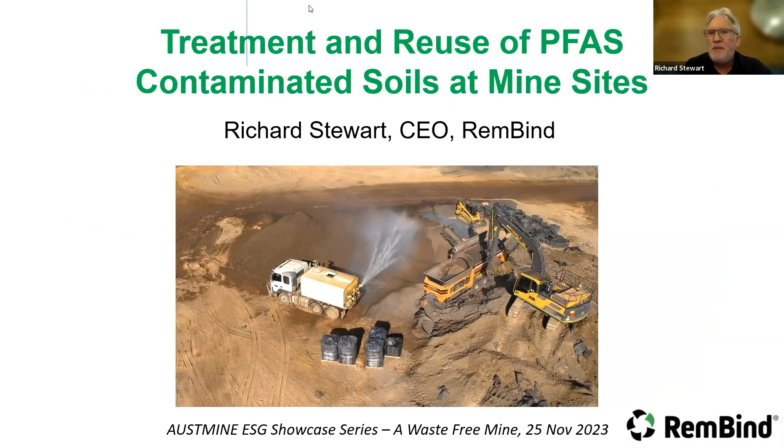I'm going to talk today about the treatment and reuse of PFAS contaminated soil at mine sites and how that aligns with the concept of a waste-free mine. So firstly, what is PFAS? It's a group of man-made chemicals that have toxicity characteristics. They're found in a range of products, including certain firefighting foams, non-stick cookware, and even, I found out recently, in makeup and lipstick, which is a bit of a worry. Due to their highly stable chemistry, they're very persistent in the environment and they accumulate. They've been found in soil and water at an increasing number of sites worldwide, including commercial airports, defence airports, and also at mine sites now.

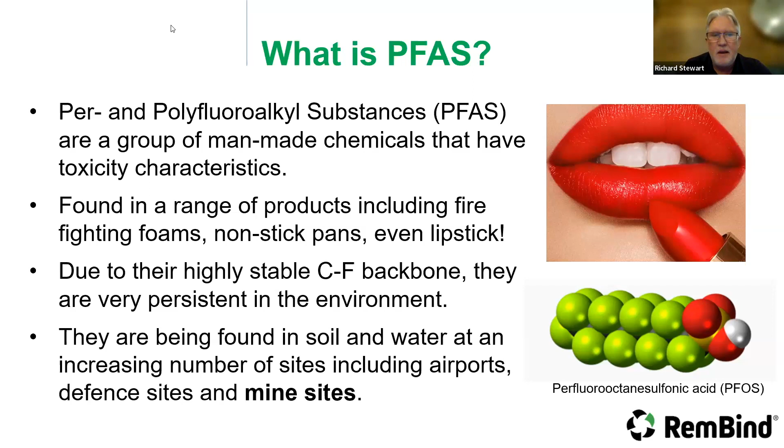So at a typical mine site, there are a number of sources of PFAS. The main source is from the historical use of certain firefighting foams for training, but also in the automated fire suppression systems throughout the mine. Once PFAS makes its way into the soil, it can then make its way to other parts of the mine. So, for example, if surface water runoff takes PFAS from a fire training area into a dam, and then water trucks load up from that dam and use that water for dust suppression on roadways, then you get a wider spread of that PFAS issue across the mine site, albeit at a more diffuse level. And so PFAS in the soil is considered a waste, and then you have to look at how you're going to manage that.

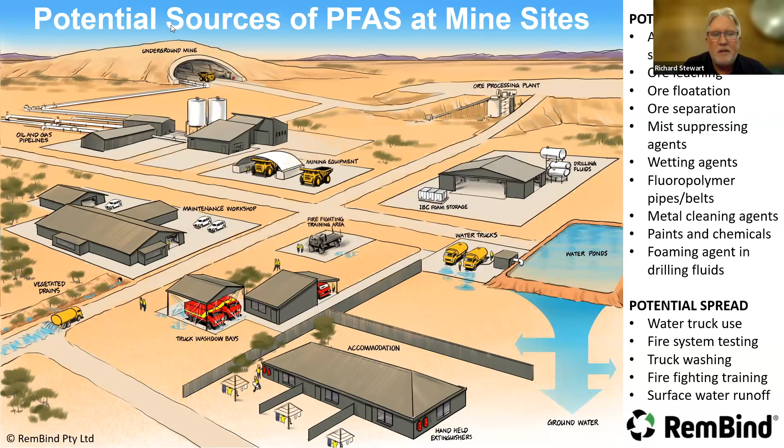The treatment alternatives for PFAS in soil are shown here. The first one's landfill. Most of these mine sites that we're talking about are hundreds or thousands of kilometres from the local engineered landfill. So that's a cost prohibitive pathway, but also it's unsustainable to put large volumes of relatively low PFAS soil into landfill. The other options shown here are thermal treatment, which there's not really portable equipment available for yet for on-site treatment, and also it's energy intensive, so expensive. Soil washing, where you wash the PFAS out of the soil, is a viable technology. There's some portable equipment available, but then you're left with a PFAS liquid concentrate, which you have to deal with, which is costly and also logistically difficult.

And the third option here is stabilization, which I'm going to talk about today. This is where you add a powder to the soil. It binds up the PFAS. It doesn't remove it, but it stops it leaching into groundwater, where it can cause issues with human health and the environment. And so the study that I've referenced here shows that stabilization is the most mature and viable of those treatment technologies for soil. And it's also the most cost effective.

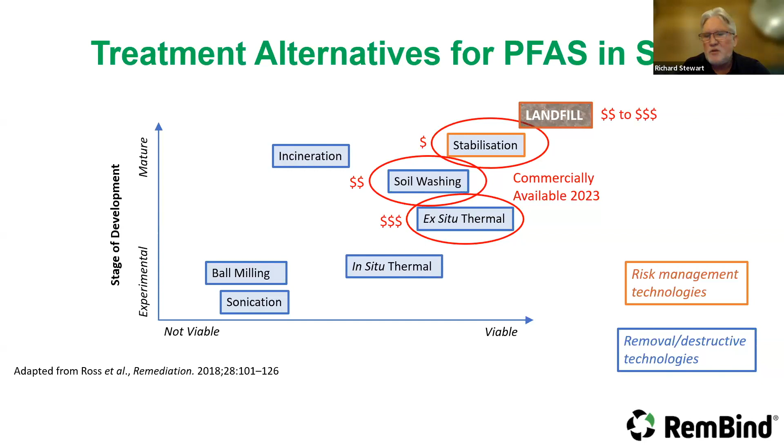Another benefit of stabilization is its greenhouse gas emissions footprint. So this data, which is out of a US market report which will be published soon, shows that stabilization has a 43% lower footprint than dig and dump or landfill, and 90% lower than offsite incineration. And there's also a much lower risk of injury and fatality because you're not having to transport that soil offsite outside the mine.

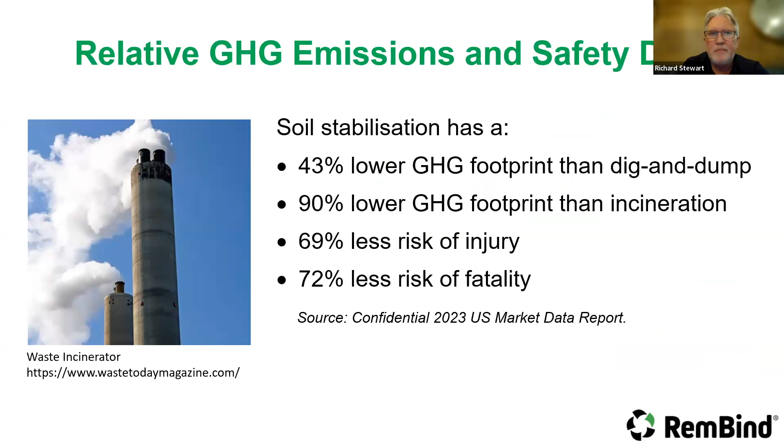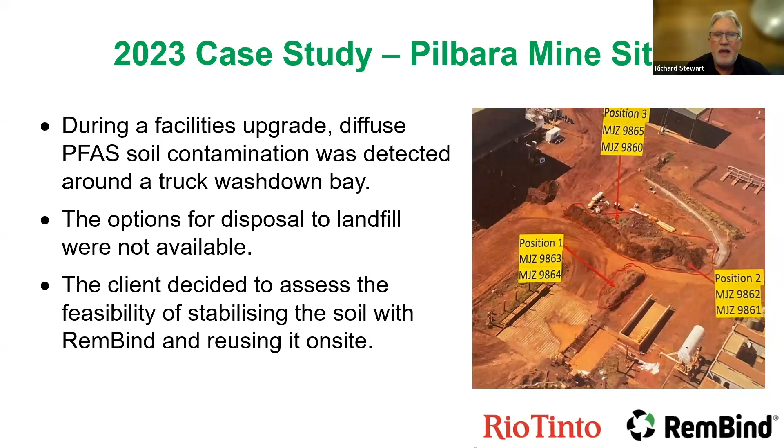So I'm going to now run quickly through a case study that we did earlier this year with Rio Tinto. During a facilities upgrade at one of their Pilbara mine sites, they found some diffuse PFAS contamination around a truck washdown bay. The options for disposal to landfill weren't available. It's a very remote mine site, and the client decided to assess the feasibility of stabilising that soil with our RemBind stabilisation products and reusing it on site.

The rationale for using our products at the time was that they'd been applied at full scale in a number of large-scale projects worldwide, so they're fully proven. There was also demonstrated long-term stability data, which had been independently validated by other parties to show that once you bind this PFAS up, even though it's still there, it won't leach in the longer term. It's also manufactured in WA in commercial quantities, so that was easily available, and it has several material handling advantages over some of the other powdered reagents that might be used for soil stabilization.

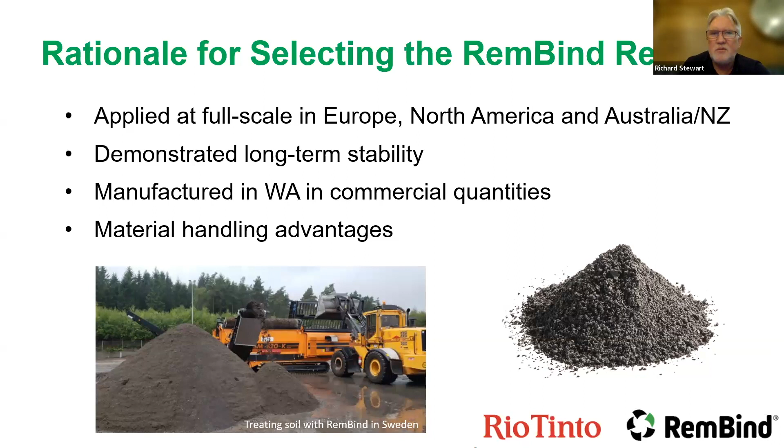So they sent us some soil samples from the site to do a feasibility trial at bench scale. The main aim of this was to determine the optimal dosage rate that could be used at full scale. Obviously, that's a cost-sensitive component, but they wanted to know the minimum dosage rate to achieve a reduction in leachability, which would allow reuse of the soil on site. And so we treated the soil with two different RemBind reagents at 1%, 2%, 5% dosage rates to get a dose curve, added some water during the mixing, waited 24 hours for it to fix, and then sent it to an external commercial laboratory for PFAS leachability analysis before and after treatment.

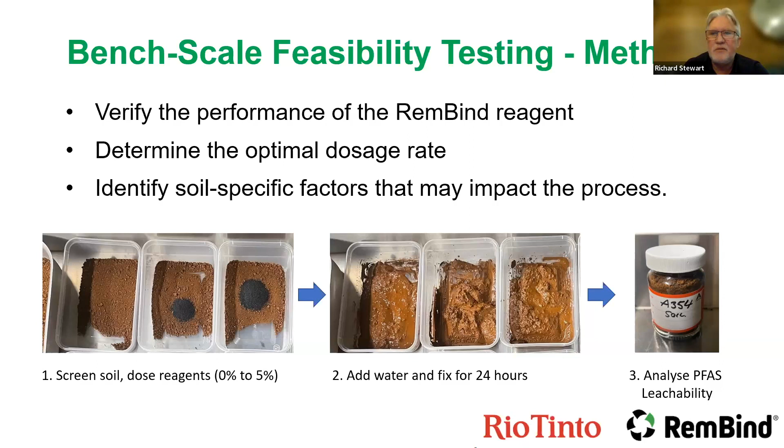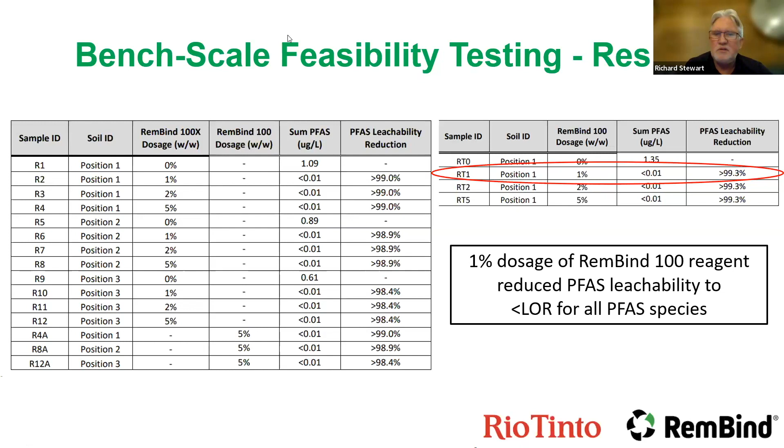Based on the success of this, Rio Tinto decided to then take that into the field for full-scale treatment of the soil from around the wash bay. They treated about 3,000 tonnes of soil. They went to a 1.5% RemBind addition just to take into account scale-up factors; it's a little bit like bucket chemistry in the field. They used an excavator and a sieve bucket to do the mixing into the soil, and a water truck to add water for dust suppression, but also to enhance the binding process.

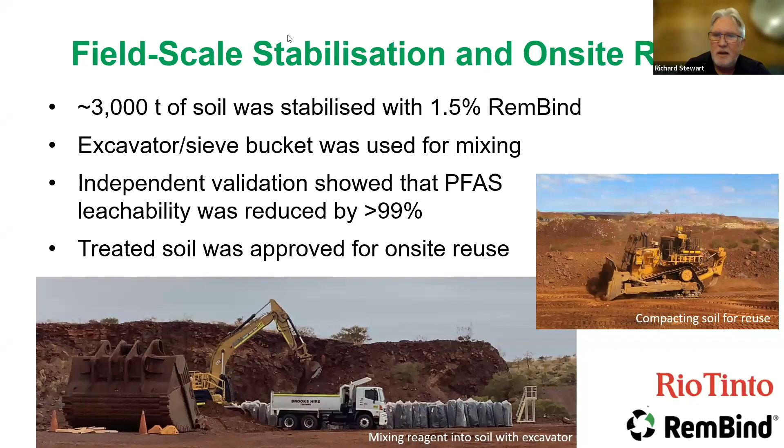Rio Tinto then independently validated the treated soil and showed that the leachability had been reduced by more than 99%, which was consistent with what we'd shown at bench scale. They then approved that soil internally for on-site reuse, and they placed it in an area away from the main mining activities. And you can see the dozer compacting the soil there on the right.

So the take-home messages from this presentation: stabilisation of soil and reuse at the mine site can be applied really cost-effectively and practically using equipment that you would normally find at any mine site. It has a relatively low greenhouse gas emissions footprint, which is becoming more and more important nowadays, compared to dig and dump and incineration options. And because we're turning what's essentially a waste soil into a resource that can be reused at site, this aligns really well with the concept of a waste-free mine.

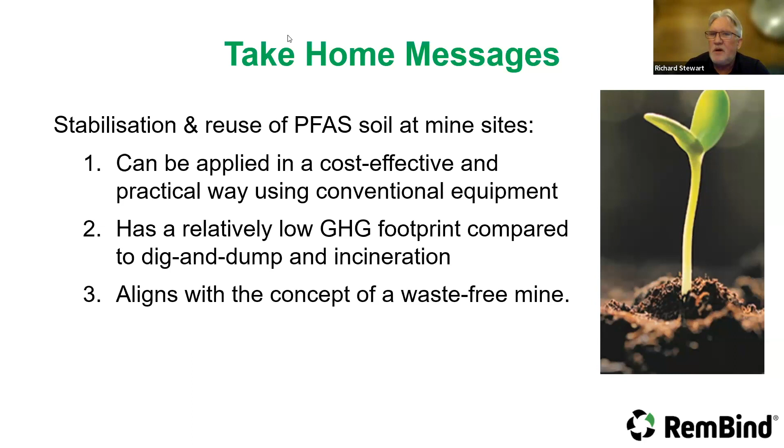One of the keys we believe at Titomic to sustainability or waste-free environments is the concept of repair and reuse. And if you're going to continually repair and reuse existing assets, it's also important that the technology used to do these repairs is sustainable and also low energy and low waste. So this is what I'll be discussing today. Titomic is an Australian company, and we have developed a capability to utilize novel sources of metal particles, and using supersonic particle deposition, we can prevent corrosion, restore geometries, and keep existing infrastructure going longer and more cost effectively.

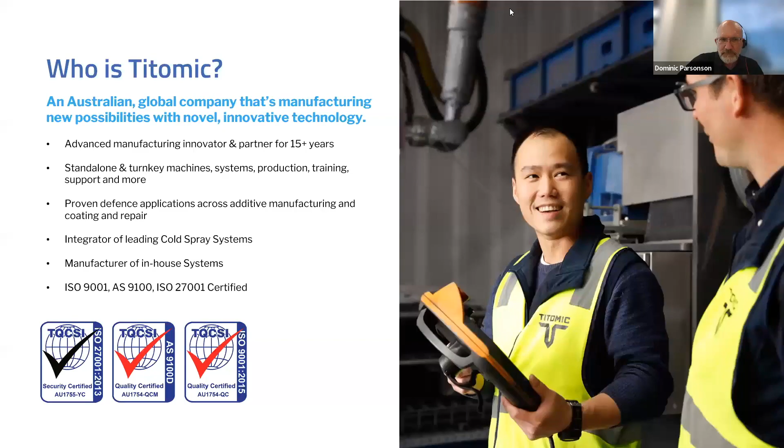The way the process works is that we take a metal particle, and unlike HVOF and many of the high energy applications, we never melt or heat the metal.

What we do is we take these metal particles and accelerate them to supersonic speed utilizing a heated gas. As these metal particles hit a substrate, they plastically deform and turn back into a solid metal.

All of this is done utilizing air as our accelerant gas and a low energy input, because all we're doing is heating the gas rather than melting the metal or utilizing any other fossil fuel derivatives to create the energy to melt or solidify the metal.

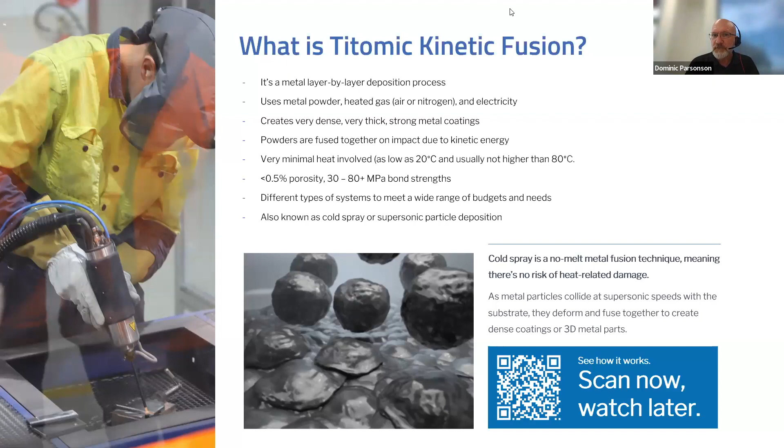As you can see by the image on the screen, we can either do it in a very complex robotic solution, or we do it in a mobile handheld solution.

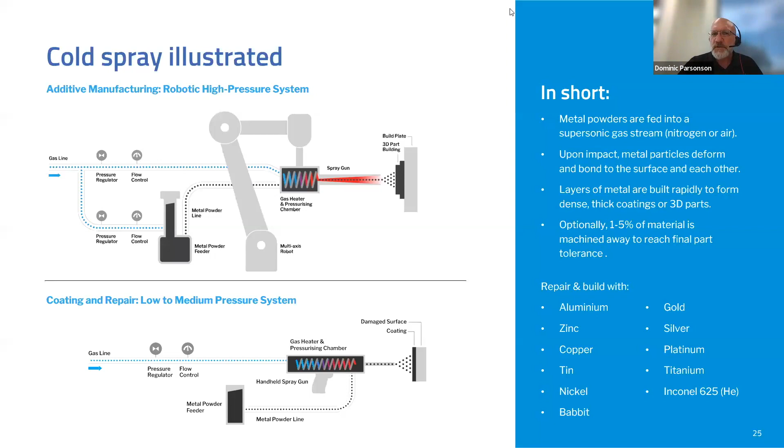So where is this useful in the mining environment? We have a number of case studies where we have demonstrated that this can be used to sustain mining equipment and keep it in service substantially for much, much longer.

In this application, which is an approved repair process by Rolls-Royce or MTU, these diesel engines are repaired every 6,000 hours. Historically, they were using an epoxy resin to repair these large diesel engines.

Epoxy resin itself is a fossil fuel derived raw material, and therefore doesn't meet those requirements for sustainability or waste-free environments.

What we do is use a portable or handheld system where we deposit metal directly onto the diesel engine crankcase or the diesel engine itself.

We're able to extend the lifespan to meet 4 refurb cycles and exceed 23,000 hours of repeatability or repeated reuse.

So this is a low waste, low energy metal repair process that enables these diesel engines to stay in service substantially longer.

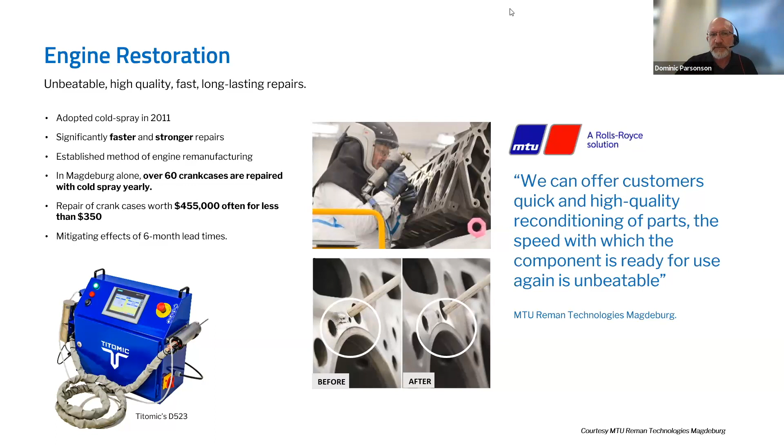We're able to do the same technology for repair of bearing housings and other components on a mining surface or mining environment. Here we've used a nickel powder to repair a bearing housing and a sleeving to ensure that this system can be put back into use.

Historically, this would have been repaired with a weld, and a weld is a high energy utilization technology, whereas, as I said, this uses very, very low energy.

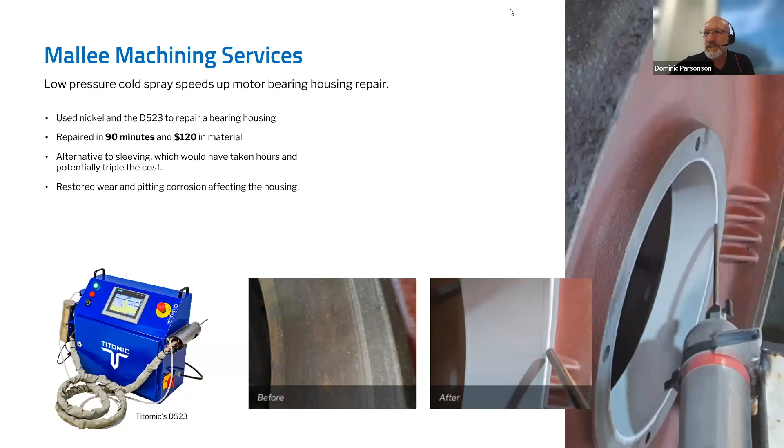In fact, many of our systems run off solar power or battery to ensure they can be used in a mobile environment and in a more sustainable way.

One of the challenges we see when we're utilizing our technology out in the field is that when repairing things like radiators on large wind turbine environments or diesel tanks in this instance.

It requires the drainage and removal of hazardous fuels or hazardous oils. In many cases, this results in wastage, spillage, and contamination of soil.

In this particular instance, we have demonstrated we are able to repair both an oil transformer as well as a diesel fuel tank utilizing our technology without having to drain, and therefore without putting the environment at risk by contamination.

It's a low temperature application. The temperature of the metal never exceeds about 30 or 40 degrees C. There's no flame involved. There's no molten metal involved.

So very, very safe. And it creates a high density impermeable coating and replaces, in many cases, welding or epoxy repair applications.

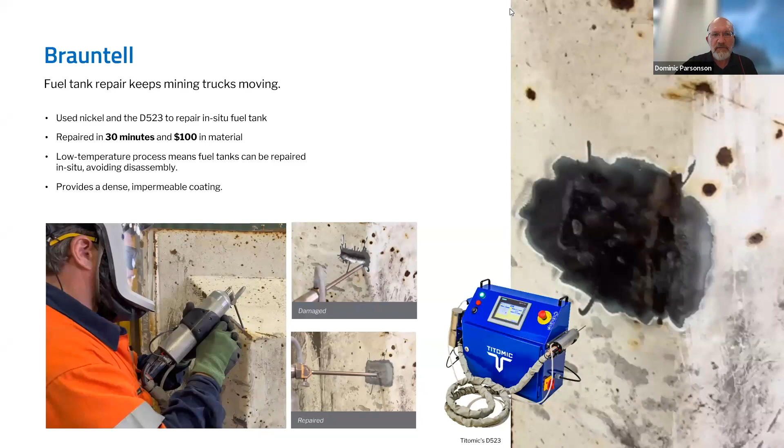One of our most recent success stories, and this is an application that's mining adjacent, and we'll be rolling this out across the rail infrastructure requirements throughout Australia, is where these very large electric motors often incur damage on the bearing surface.

Typically these would then be stripped down, which requires huge amounts of labor and effort before they're repaired.

With our process, we're able to take these very large motors, and without stripping them down and incurring large labor costs and wastage costs, we're able to very rapidly, cost effectively, and safely repair and restore the shafts, ensuring that they become suitable for reuse.

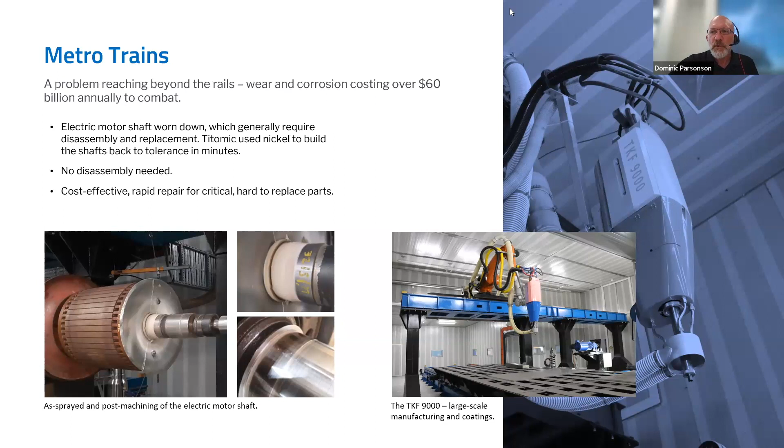So these, we have now done over 12 motors, and we expect to do another 300 or 400 over the next 14 months in the Victoria region, and then we will look at extending that across Australia.

So all in all, the purpose of this technology is to be able to rapidly and cost effectively ensure you can repair and sustain mining infrastructure. It does it in a low wastage environment. The only waste byproduct is metal powder, and that metal powder will be materials like copper, aluminium, nickel, or zinc. Low energy consumption - the only energy required is to heat the gas. We are not melting metal, and there are no nasty chemicals or nasty waste byproducts from the application.

Exceptionally easy to use, and it has a number of benefits in that respect with regards to waste reduction. It has economic benefits. It enhances the skill levels of our operators by providing them extra skills and extra capabilities. It provides supply chain independence and also allows you to bring that repair methodology onto the mine site as well as remote, meaning you are not shipping expensive and heavy equipment around the country to repair facilities, which in itself is not a particularly sustainable methodology.

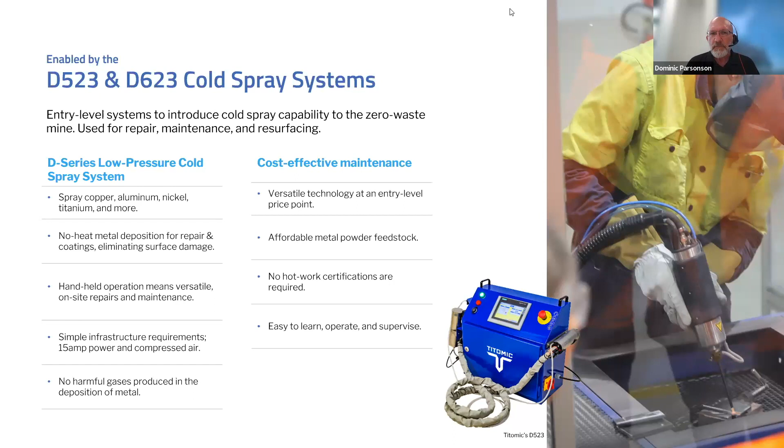In fact, this easily mounts onto the back of a utility vehicle or a ute and can be run remotely to do any of these repairs that I have mentioned. So if you have any further questions, please feel free to reach out to our team and approach us via titomic.com. Thank you very much.

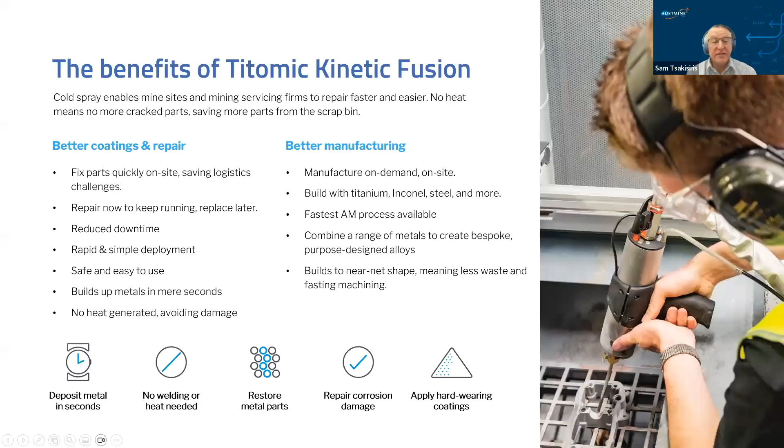Did you know that mining produces more than 44 times the amount of waste produced by all Australian municipalities? Or how about the fact that the Australian circular economy is targeted to be worth $30 billion by 2030 and around $210 billion by 2050? These are just a couple of reasons why the waste-free mine is a critical component to achieving sustainable mining, and it gives you an idea of the potential that can be unlocked when done correctly.

G'day everyone, I'm Ben Kirkwood and I'm part of Accenture's sustainability strategy. Today, I want you to take away 2 points. The first is that when done right, mining operations can be circular, with materials being repurposed and recycled upon mine completion. The second is that even a small change in behaviour can have a large collective positive outcome from a sustainability perspective.

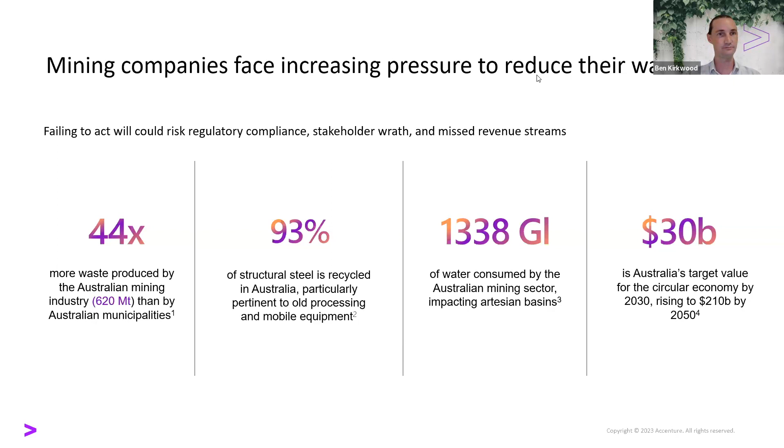So how can we actually go about becoming a waste-free mine? I believe there's 3 key ways to do it. The first is the obvious - your consumption optimization of resources across operations. This is your stock standard power, water and consumables optimization, as well as your improved mine design, which targets minimal material movement. I'm not really going to go into this today, as I think you've all got a fair idea of best practices. However, if you do want to talk about it, please let me know either in the Q&A or feel free to have a chat with me after this.

The second is the criticality for embedded circular design. This targets the reuse, repurposing and recycling of componentry such as steel, tyres and other building materials. Given the amount of material that goes into developing and operating a site over its life, material circularity can have massive implications.

And thirdly, the impact of sustainable human behaviour cannot be understated. You can take a can, which we all know is made out of aluminium and 100% recyclable, but if you just go and throw it in the general waste bin, it's still going to end up in waste, in landfill.

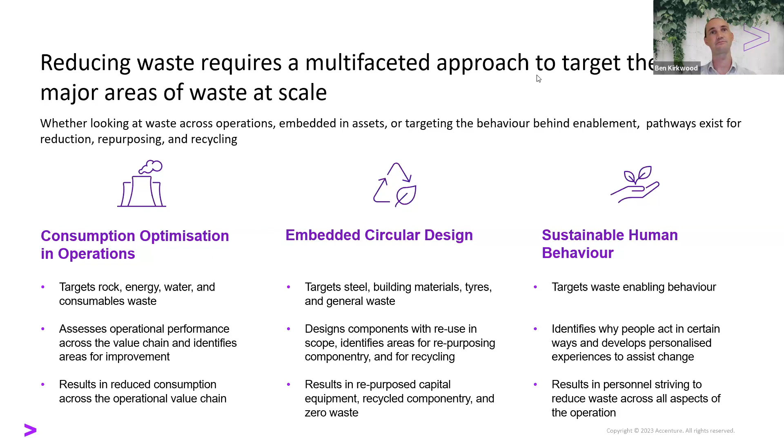Now, speaking specifically to circular design, technology plays a key role in the way assets are designed and constructed, enabling them to be repurposed and recycled. This is becoming quite incredibly pertinent. With changing regulations coming into effect in Australia, we're seeing the disposal of some wastes completely banned - a good example of that is tyres for 2025. A good example of where materials are being recycled is Rio's current alumina refinery being torn down and recycled. They expect to get about 142,000 tonnes of steel from that and 300,000 tonnes of concrete.

Meanwhile, a great example of repurposing is there's a few dongers sitting in the middle of central Queensland at the moment, housing some FIFO workers, that used to be the accommodation for athletes at the Sydney Olympics, and they're still in use today.

So technology really enables circular design across the asset lifecycle, and you can utilise tech to gain visibility across a project and it enables you the ability to perform assessments which lead you to gauge your project's both sustainability and circularity credentials. That helps you to ensure that your projects are in line with your overarching sustainability strategy.

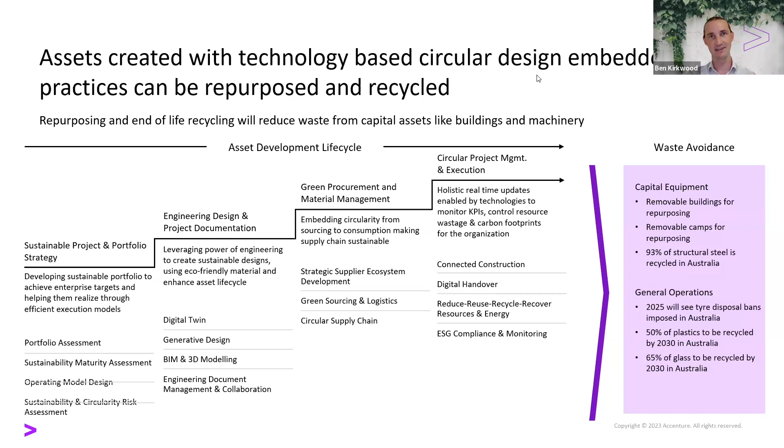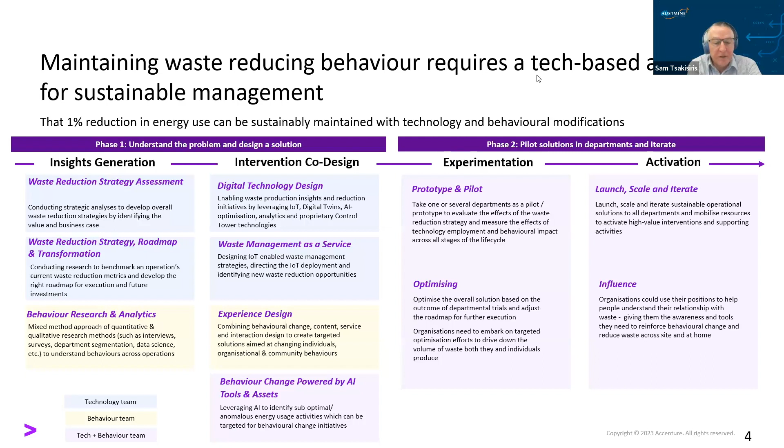Good morning, everybody. It's early morning here in Pretoria, South Africa, where I am. Today I'm going to tell you about the impact our technology is making on recovery of vanadium and its future applications. I'm Nanne Vegter. My technical background is in extractive metallurgy. I have 40 years of experience in the South African mining and metallurgical industry, and I joined IPEX two years ago. I embarked on an amazing journey of discovery of the complicated chemistry of vanadium, and I hope to be amazed and intrigued further as I go along on this journey.

The parties in this process are Core Resources, a specialist developer of processes and technology in clean, sustainable production of minerals and metals. They focus on critical minerals essential for the world's energy transition. It's a company with a very illustrious history, and they've just celebrated two momentous occasions: Core itself is 20 years old, and the laboratories, established by Mount Isa Mines, were built 40 years ago.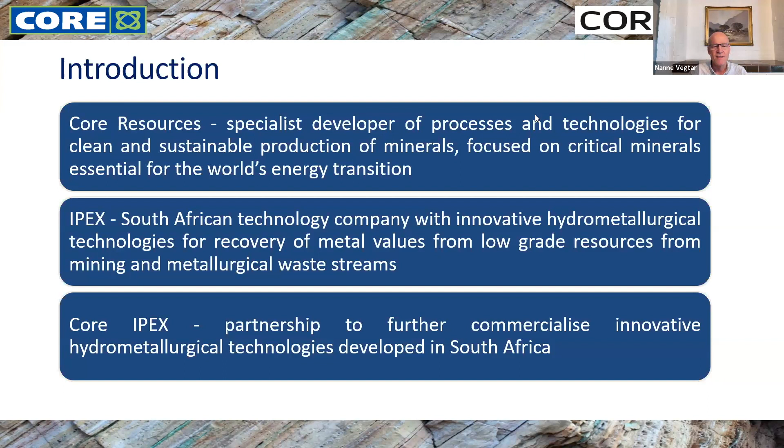Once the resin is saturated with the metal ion, it's taken out of that stream and goes into a process where the ion is recovered from the resin using an eluent, a solution that specifically displaces the metal ions. That produces a product stream with high concentration and purity of vanadium ions. In that same process, the resin is regenerated and becomes suitable for reintroducing to the adsorption stage.

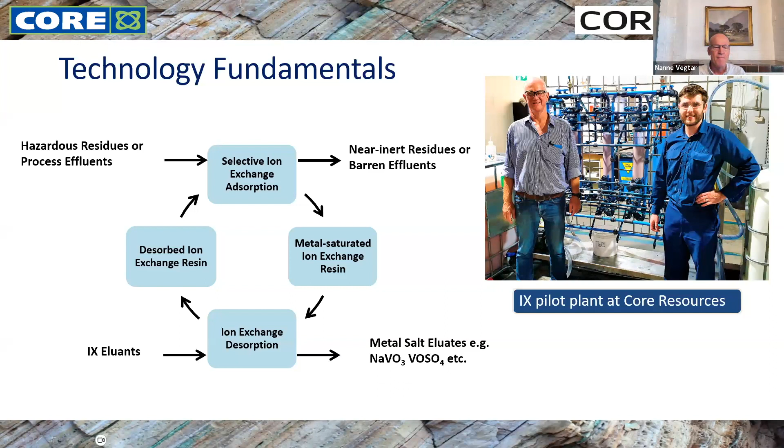Core IPEX has refined and optimized the engineering, peripheral, and operational conditions that go with this basic process, and has applied that in its process. So the process was commercialized in 2006.

At the Wapatskloof site, where there is a calcined tailings dump of a discontinued vanadium primary producer, it ran a campaign of 5 years from 2006 to 2010, and over that period recovered 860 tons of contained vanadium pentoxide in a high purity solution, which was sold to primary vanadium refineries in the region. The environmental impact from this intervention was that seepage tenor from that tailings dam reduced from about 8 grams a litre to 0.2 grams a litre over that 5-year period.

In addition, since that project was done, half the tailings material, which is high in iron, was reclaimed and exported for iron making feedstock.

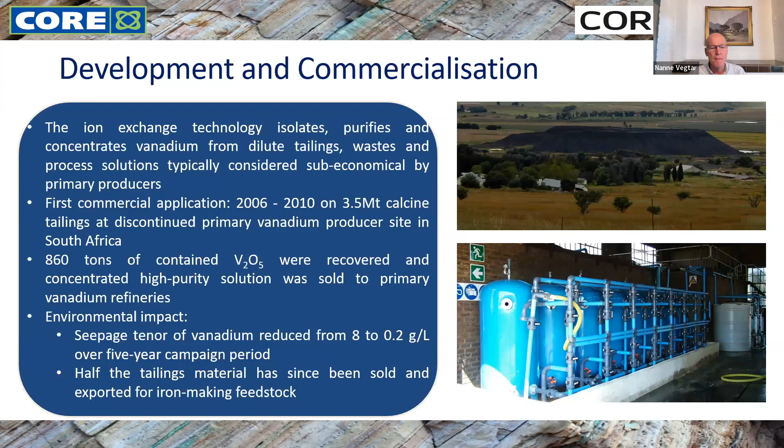Our current operations, since then - the second operation was started in 2017 and a third one earlier this year. Both were retrofitted at sites of South African primary vanadium producers. In essence, they replicated refined versions of that initial concept as applied at the first commercial site. These plants were engineered in-house and also project managed and installed by in-house resources.

The second commercial operation had a very reliable track record, with availabilities achieved of over 97% over the first 5-year tolling contract period. Other vital statistics include vanadium recoveries in excess of 90%. The plant handled influent concentrations ranging from 0.6 to 1.1 gram per liter of vanadium.

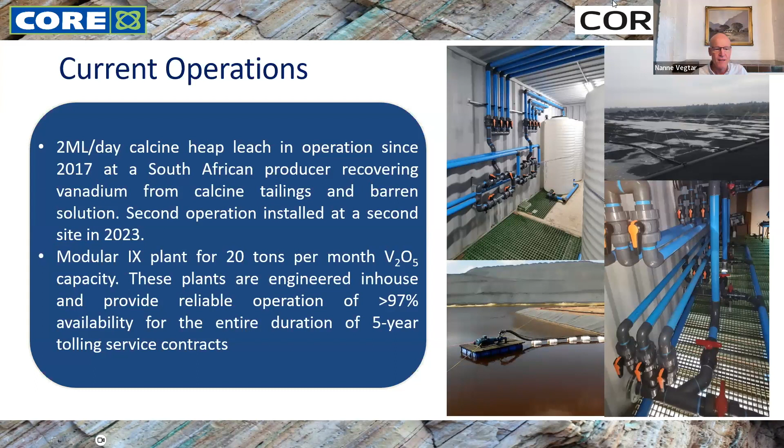Our future, we're very excited about the possibilities of this technology, and we are targeting the expansion of this application to retrofit other vanadium producers, and also the Australian projects on vanadiferous magnetite from Western Australia and shale deposits of Queensland. We're working on the enhancement of the technology to produce high purity vanadium products for redox flow and aerospace applications. And we also know that there's potential application of this technology to other critical metals, and development work has been undertaken in this regard.

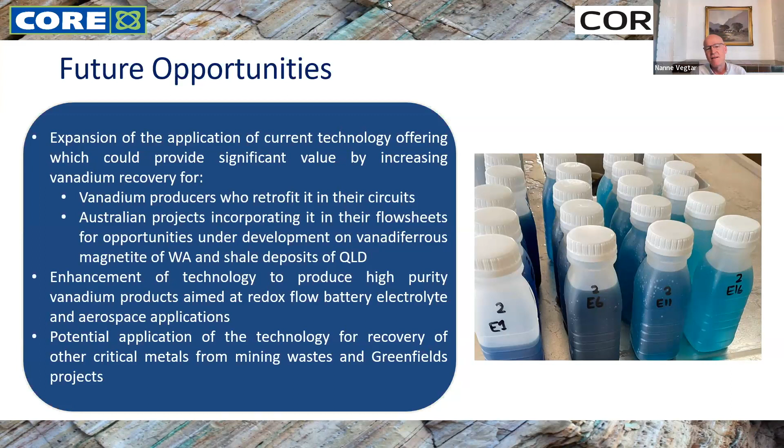The photo on the right-hand side shows the beautiful blue vanadium solutions that we've generated as part of our process development work.

For IPEX, our ion exchange technology offers proven financial and environmental benefits to recover and concentrate vanadium from dilute streams. It could be retrofitted to existing operations, and it could also be incorporated in metallurgical cleanup and greenfield studies. And it offers a very exciting process route to high purity vanadium and other metal products.

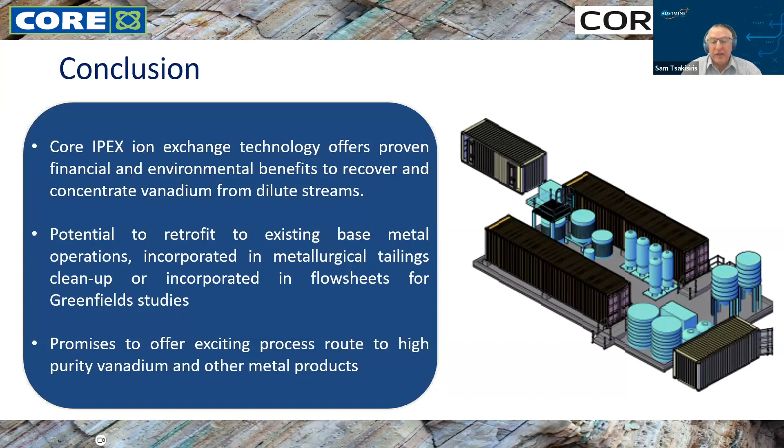Thanks, Sam. Thanks, everyone. An honour to be the last presenter on the last of the series. Thank you very much. Just to not take long today, I think coming from a different perspective and different point of view here, the others, and fascinating to listen to everyone else today from a technical point of view, and looking at ways in which we can reduce waste in mining, and you know, fantastic the way technology seems to be moving. I think from our point of view, being a ESG advisory, you know, just to get through that first page, all the disclaimers that we love to do.

Just from our point of view, we don't, I guess, work as technically as many of the guests on today. Just going to come from a slightly different point of view in that we'll certainly work alongside a lot of providers into mining, a lot of the companies that have presented today who are on the supply chains of mining, as well as a lot of explorers. And I think a couple of points just to make is explorers will be miners too one day, we hope, and they hope.

So I think one thing we've really sort of drilled down on with a lot of the explorers we work with is just making sure they get their processes and systems in place early, so that as they do go through their feasibility studies, as they do go through the different phases of exploration into discovery and into mining, that one thing we're very proud to have helped a number of companies with now is have those processes in place so that from an environmental point of view in their ESG, they can really set themselves up for future success.

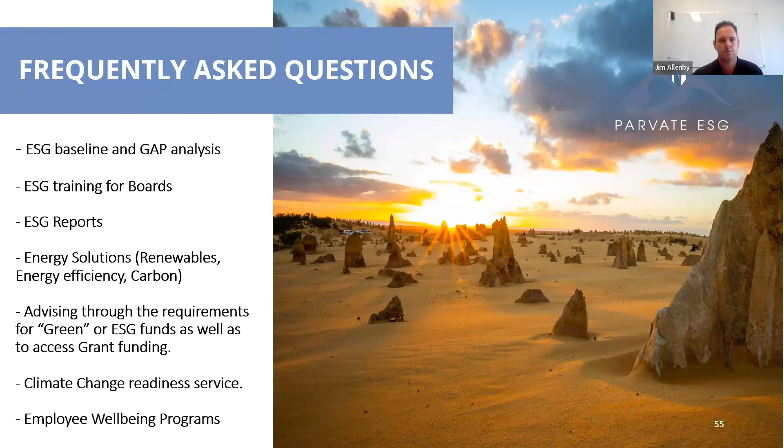If you can't measure it, you can't improve it. So we're looking at ways to measure a company's performance from an energy point of view, and more recently from a waste point of view. We're proud to work alongside partners in filtration and chemical tailings processes, who are strong from an ESG point of view, making sure what they provide to mining reduces waste and energy, while their own performance is up to scratch too. That's been an important part of our journey from supply chains into mining.

I'll use an analogy here, often linked to emissions rather than just waste reduction. Standards have come in from an ESG and accounting point of view. The good news is we've got robust standards to report against now, with less guessing about what we actually need to report, which makes it easier to implement these procedures and changes. From 2024, as early as next year, we're all going to need to do better from an ESG point of view.

Something we've noticed at Parvate the last 3 to 4 months is a really strong focus on supply chains. From an environmental point of view, we're getting judged. What's talked about most is greenhouse gas emissions, net zero targets, reducing carbon emissions. It's well documented and hard to argue we don't need to look at that. But a big part of this is also what happens with the waste after the ore's been mined, or whatever the process is. It's not just about reducing emissions in the process itself, but what happens afterwards - what do you do with the waste? So it's important we continue to educate ourselves and make sure down and upstream in our supply chains we've got robust positions in place, using the appropriate technology we've heard a lot about today.

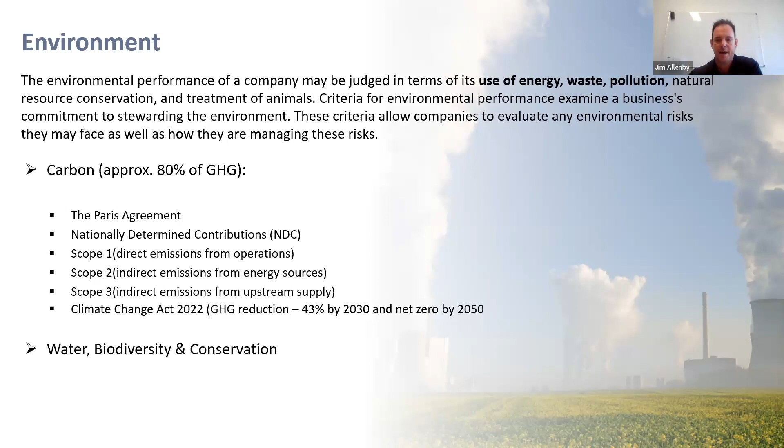Just from a visual point of view, we have discussions every day, and I'm sure many here do too, about the difference between scope 1, 2, and 3 emissions. This is something we talk to our smaller suppliers about when they ask why they need to start reporting on their energy usage, collecting their emissions, and why people want to know what they do with their waste. Well, because their scope 1 emissions and their waste gets collected into the larger company's scope 3 and various other reporting metrics, which they're being asked for by either government legislation or the large pension and super funds that invest in their companies.

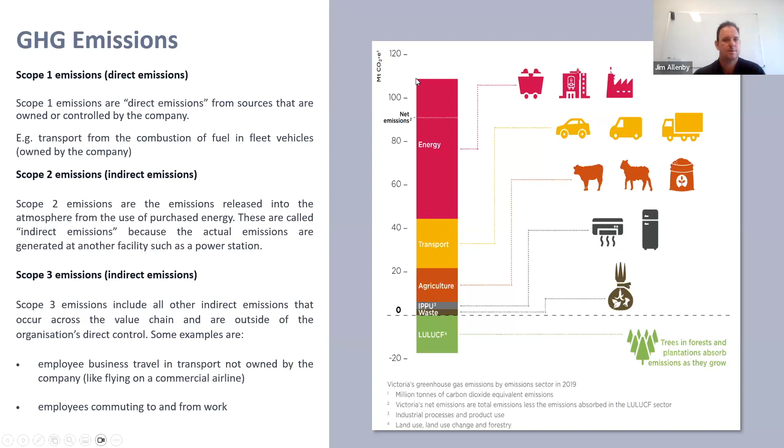So all of us, whether a small company or a big company - it depends on the complexity of the reporting and the activities involved - but it's important to understand no one's too small to start doing better in this field, because someone up the supply chain is going to be asking for this information. So, using that emissions analogy from a waste point of view: the supplier's scope 1 is the end user's scope 3. The question, potentially from anyone watching, is: is this the same in waste? I'd love to hear your point of view and discuss it.

From a large company point of view, as well as a technology point of view, how can we help supply chains gather information and do better, to make sure the overall environmental performance of a company, a mine, a process - whatever it is - improves? How can we all, as a collective, from supplier into end user, into those treating the waste or tailings, make sure we're on the same page, reducing energy, reducing waste, and looking at the most efficient ways to do it? It's about sharing information, collaborating, and making sure that information is easily accessible and simple to follow. One criticism could be that this has been a very complicated field, so I'm keen that we can all simplify it and work together.

Thanks very much, Jim. Another great angle on supply chains, getting those right with process and also helping those explorers as well. That's the last of the presentations. So we will start now with some questions from the audience. And I'll just get through those now.